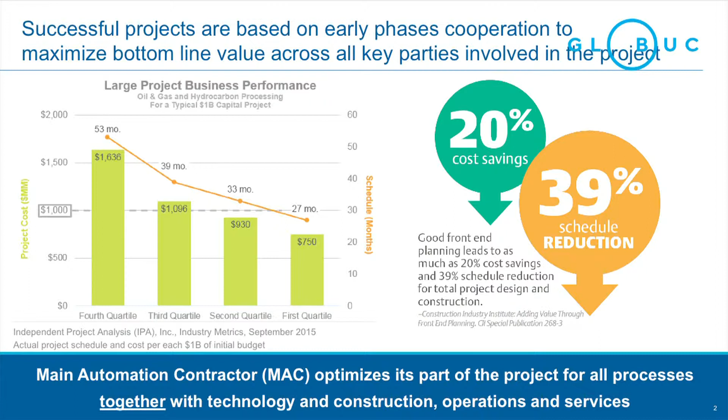So why such radical changes from the monetary point of view that predicate competitiveness in the market? The world is changing very rapidly now, and the only thing guaranteed is that changes are guaranteed, nothing else is. Even in our core business, we sometimes fail to keep track of new things emerging, and that could have a radical impact on how and when to do one's next project.

20 years ago, there were changes, but not that much of a change. If you remember how we did projects 5 years ago versus now, we can appreciate qualitative changes.

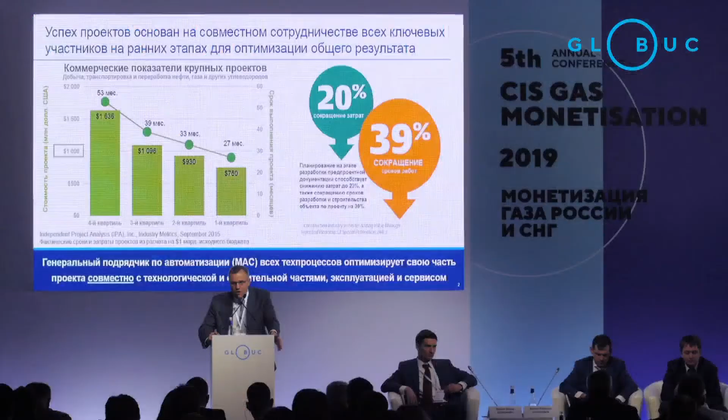But even if all parts of the project are ideal, there is still the issue of interfacing at an early phase. Because when we do automation in a certain way, we can do the construction bit differently, the technology bit differently, and our suppliers and vendors can operate differently. Therefore, doing a decent job of organizing project work at early phases becomes an absolute key. Thus, such radical economic differences exist between quartiles 1 and 4.

Then all that goes into the operation phase. This is just an example of how equipment should be selected. During operation, this issue becomes even more important than in the design phase. This is an example of a global petrochemical company which has operations on virtually all continents.

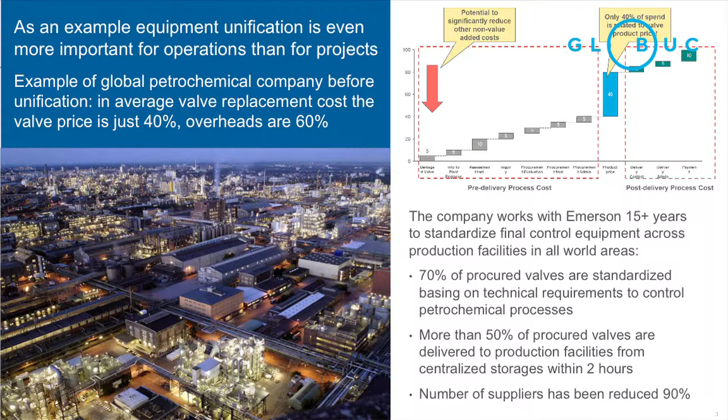We sat down and calculated that valves of various types account for 40% of cost during operation. That's the cost of the valves. All the rest is overhead for the global petrochemical company: warehousing, professionals for various types of equipment, bureaucratic procedures for purchasing, tenders, and so on and so forth. So if we add all the overheads together, we end up with these kinds of findings.

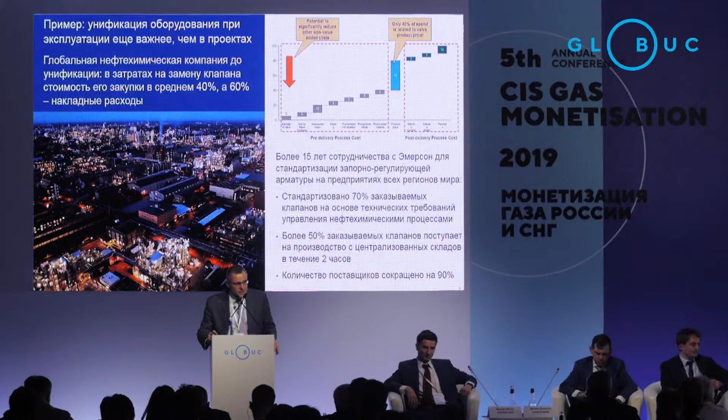We worked with them to standardize that. The project started quite a long time ago, and now more than 70% of all procured valves for all operations on all continents are standardized, and more than 50% of them are delivered to production facilities from centralized storage within 2 hours. We have a certain level of inventory at warehouses throughout the world. That's an example of how the choice of equipment impacts efficiency.

Option 1: EPC contractors and design institutes choose equipment and get end user confirmation. Second scenario: the end user unifies equipment for particular units or parts of the project. The third option is when the end user unifies equipment for the entire project, taking into consideration new technologies, operations, and experience from existing production facilities. That's important for reliability.

Let us run the poll, if I may. The question is how it is happening now. Let's wait a bit longer, about 30 seconds. So far only 5 people have voted.

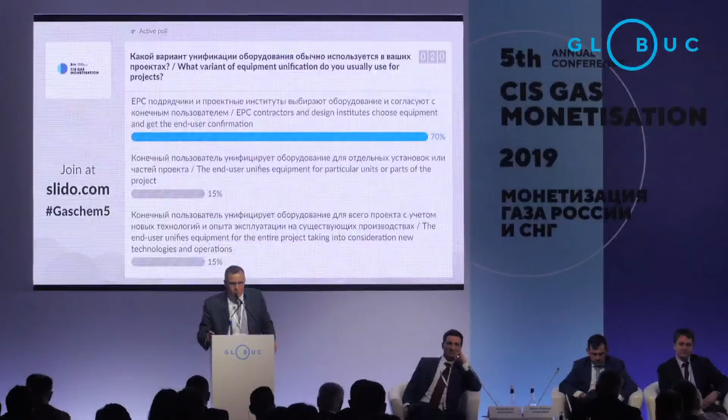Let us go back to the presentation and I will continue with my line of thinking. So using our example.

First of all, your equipment should be reliable and accurate. In our case, accuracy is good. I can assure you of the following: just as in a car, whatever motor you might have in the world, if your tires are not good enough, you will find yourself somewhere in the ditch.

So from the point of view of automation, it is absolutely paramount to be still connected with reality. Installation of the sensors is important. If the sensors are not calibrated in the right way, that becomes important.

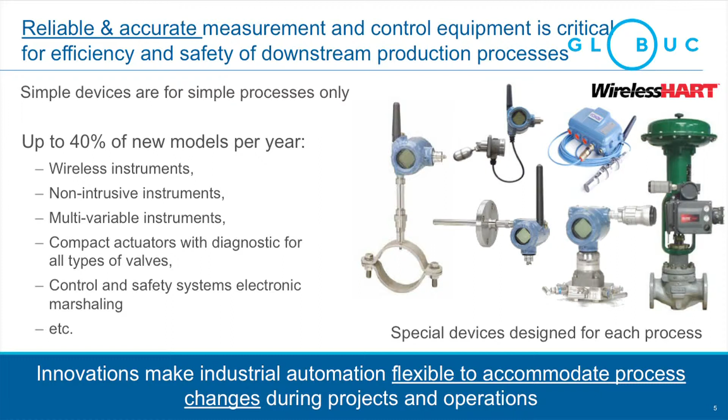Up to 40% of new models per year focus on one key thing: to make it flexibly adjustable to the changes in your requirements and your processes. That is critical for the design and then in the process of operation.

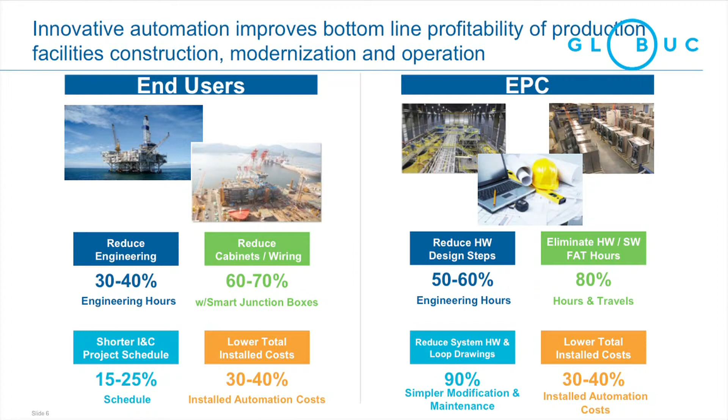Going back to the issue of standardization of equipment and the balance between the final user and the EPC contractor, we shouldn't look at this as the equation with zero results. That doesn't mean that everything gained from the vendor is the profit. Without going into details, if we are to implement cutting-edge engineering practices on top of that, we could achieve the positive economic effect for both end users and also design institutes and the suppliers.

The companies should work as one team and then share the result. If you first share and then try to do something, there will be nothing to share.

Now, a couple more cases where this concept is used. Standardization across all the projects, that is option 3. Monetization of gas is our core thing. The two largest projects in LNG in terms of tonnage are the one in Qatar Gas, and the world's largest FLNG of Shell.

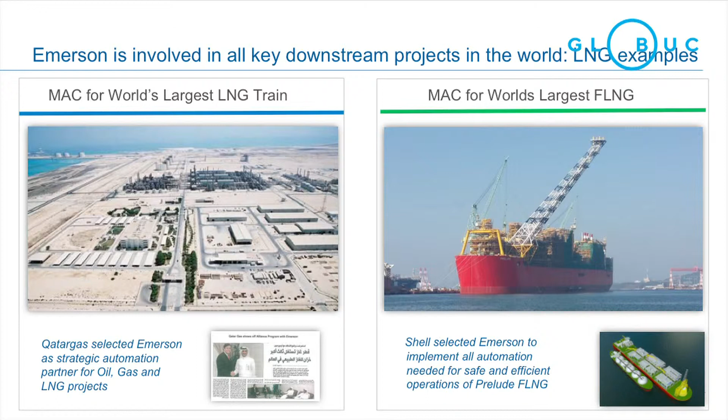That is a complex R&D and technical undertaking, and from that point of view, strategic partnership becomes paramount. Without that, it is impossible to do such large projects, and equipment was designed specifically for the project, starting from the R&D. In oil and gas chemistry, I can assure you that the concept of standardization throughout the process was used in those projects throughout the world.

In Russia, since we did the poll, primarily that is relevant for production. But in the processing domain, there are certain achievements. I have in mind Yamal LNG and Vysotsk LNG. This is not exactly the core topic for those of you here, but the principle can be adjusted for the gas chemical use in exactly the same way.

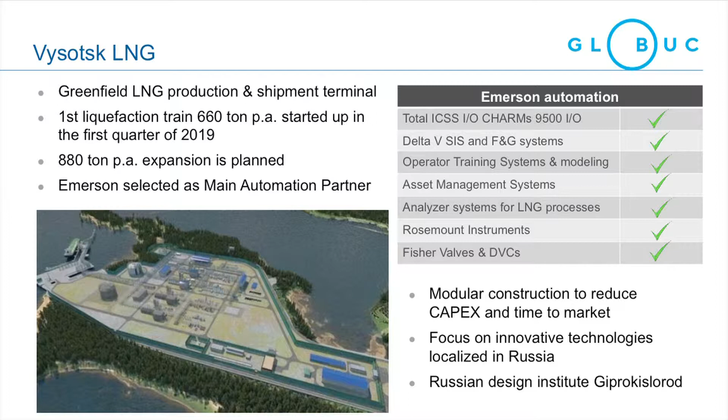And the first cargo of LNG was loaded not very long ago. In Yamal, the situation is different. It is a classic example of option one, when EPC contractors from all over the world send their people there, they see a great variety of approaches, and we have to have quite a large number of

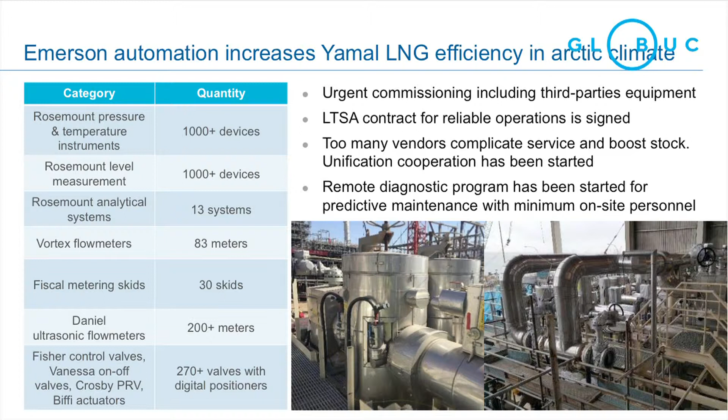Russian engineers to deal with issues on the spot. First of all, commissioning it with deadlines which are yesterday, operating it in the Arctic conditions, and then if there is something associated with reliability issues, they need diagnostics and so on. We did all that in the first two lines in Yamal. Now train 3 and 4 will be built, having in mind the actual operational experience we have accumulated.

Essentially, the point of that digital revolution we have been talking about: 5 to 10 years ago, we didn't measure certain parameters. Now we can measure those quite efficiently. This is just the example of valves, and the measurements we can take allow us to see when and what kind of problems will most likely occur.

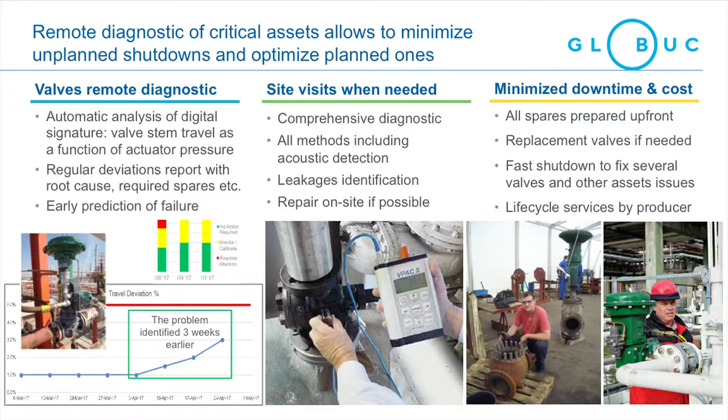And therefore we can be proactive in rectifying the situation, and we can resort to various measures. And if we cannot do without maintenance, we can do maintenance focusing on several units simultaneously, and this is what it leads to.

Together with the organizers of this conference, we visited a refinery which also had a base chemicals business component. For 10 million tons per year, they employ 400 members of staff. For Russia, this is quite unique.

In Russia, the average headcount for such operations is 5 to 10 times higher. And it's not only the problem of payroll, it's worse than that.

Such a great number of challenging pieces of equipment mean that members of staff are not always knowledgeable and cannot deal with those pieces of equipment in the optimal way. And that means competencies with such high-tech pieces of equipment are very important.

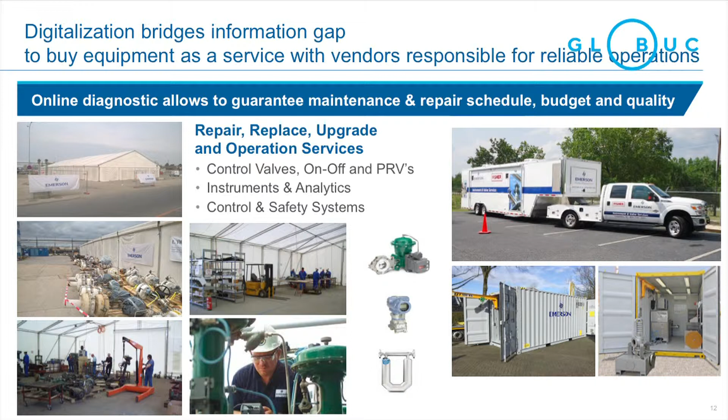Our Russian colleagues asked our Austrian colleagues how they managed to achieve that. The answer was that all the key categories were standardized, and for the time of maintenance, we basically have 260 people of permanent staff going on vacation. Then we sign the contracts for diagnostics. The contractors monitor everything which is possible on a remote basis, and when we have to stop the facility for maintenance, we maintain everything possible.

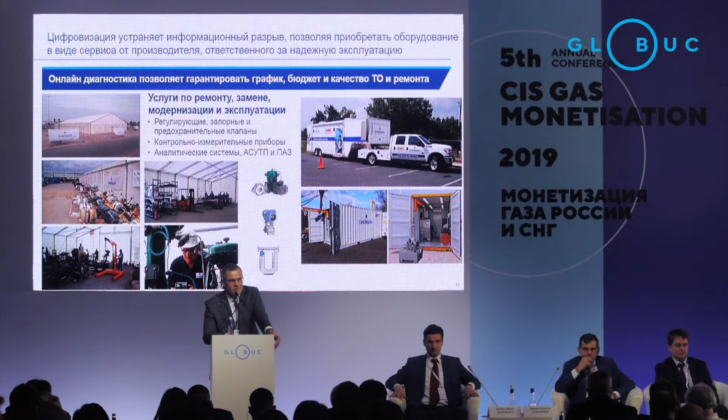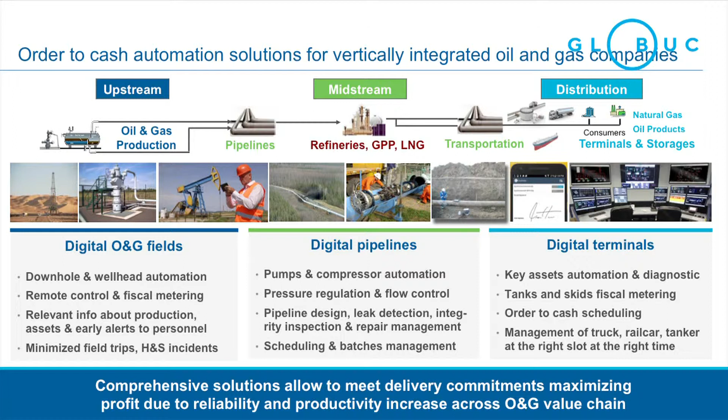Therefore, Europe was surviving at the refining margins of $2 to $3 per barrel. We were basically chuckling at that in 2012 and 2013, but now we appreciate what was behind that. And of course, the devil is in the details. It is easier said than done, and starting with the assumption that all the production facilities are different.

Apart from processing, there is production and transportation, and based on that and having in mind certain parameters, we have to provide all kinds of solutions. Downhole and wellhead automation, all that has to be integrated and adjusted for a specific purpose. That is especially true for the vertically integrated companies. They have the complex chain of adding value, and we should look at that in its entirety.

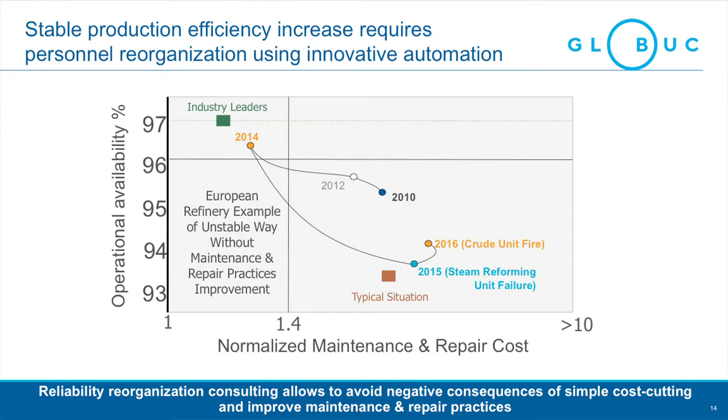A European company experimented with that, and the straightforward way, basically, which leads to hell, is to cut costs and change nothing. Let us cut everything now. We do the cutting on the members of staff, we do less maintenance and inspections, and initially it is even regarded as helpful.

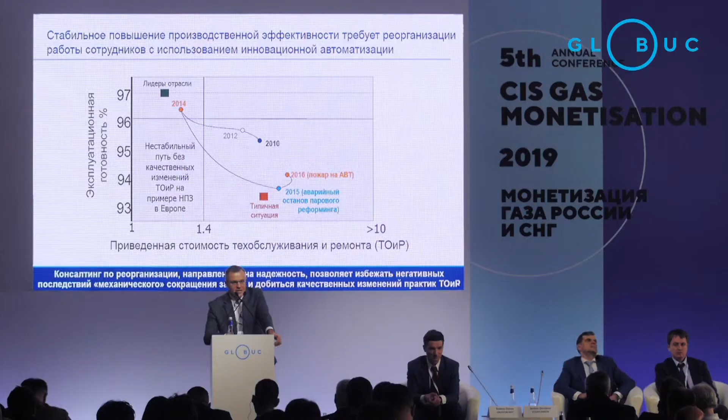They were going to that point, and they made it from 2010 to 2014, but then a fire broke out, and they had basically to return to a point which is worse than their initial starting point, because of the crude unit fire and steam reforming unit failure. So there are many ways to do it differently. For instance, why wouldn't they resort to diagnostics? But that requires changes in the organizational structure.

One shouldn't think that innovation is something which is delivered by a wave of a magic wand. No, far from that. Changes have to be made in ways of doing one's business and operating. No innovations will ever be performing if people do not perform in a different way using such innovations. So we purchased a consultancy, which is now part of our perimeter, which focuses on reorganizational consulting around the innovations. Just to emphasize, that is a very important aspect.

When one comes from design to operations, people are all important. Changes are driven by people, and primarily those are departments of operational efficiency. I have about 90 business cards from people who are heads of departments of operational efficiency. They get paid if the economic parameters of the business are increasing. They could be external or internal to the perimeter of the company, but their activities are paramount for success of the business. So a couple of minutes about our story and our people.

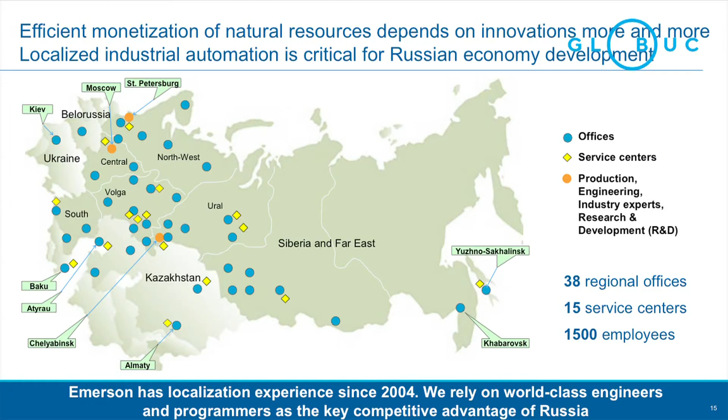We started doing business in 2004, not 2014, but 2004. Now we have the largest headcount out of the entire range of companies of our domain, 1,500 people. And starting 2004, we have been doing that because of economic considerations, using the key Russian advantage, that is programming engineers of the highest level. We purchased a relevant company in Chelyabinsk, and the guys were winners of international contests. That is our principal economic advantage, which enabled us to do everything else in Russia. So without people, there wouldn't have been anything.

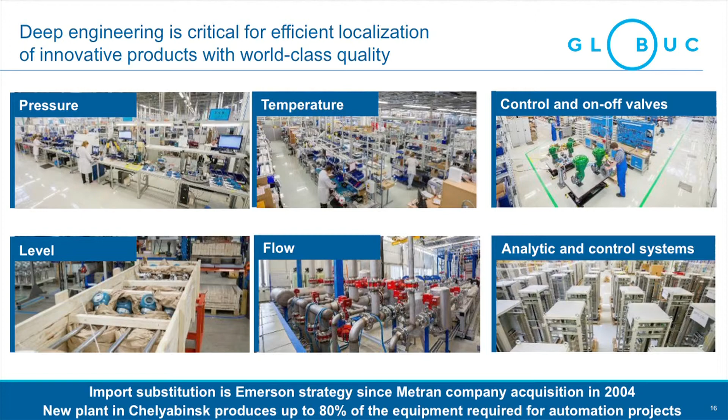Now we are building the second train of our fabrication facility, and up to 80% of all the pieces of hardware we offer for Russian projects is made in Russia. Starting 2014, we went even further into localization, and by 2015 we would manufacture all those types of equipment, all kinds of valves, drives, and so on.

And the last slide, which focuses on localization. Our engineering center of 100+ engineers does the R&D for the entire global operations. If something they come up with is efficient, it is used throughout the world. That is especially true for low temperature options, small size instrumentation, sensors. They were developed in Chelyabinsk, patents were taken out, and now they're used throughout the world. And our team of engineers enabled us to localize fabrication and production in a smart way. Not everything should always be localized, based on economic considerations.

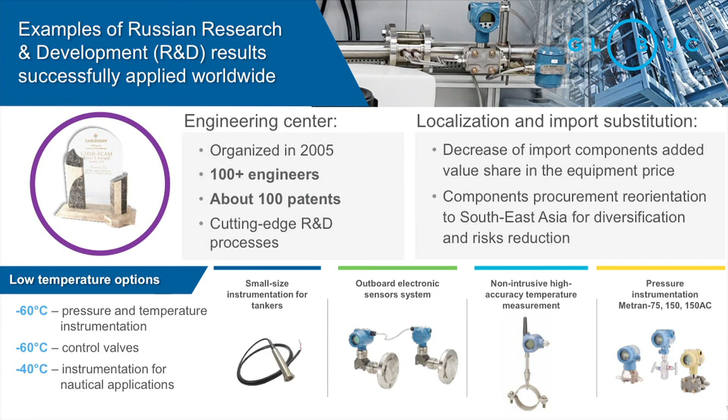And so, wrapping up my story, in terms of localization, we decrease the share of imported components. Now it is less than 25% in the price of the equipment, and to deal with sanctions risks, we refocus to Southeast Asia for diversification in terms of procurement. That is all. I think it will be useful for your projects and operational issues.